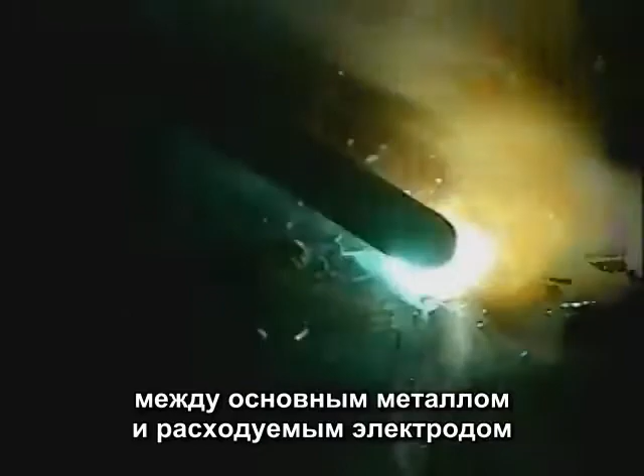From fabrication and repair shops to backyard garages, arc welding is one of the most common and versatile methods of joining metal. This is the SMAW, or shielded metal arc welding process. Electric current from a welding machine produces an arc between the base metal and a consumable electrode, which is the welding rod. That arc burns the flux coating on the rod, creating gases that shield the weld area from coming in contact with oxygen in the air. The gases surrounding the arc are superheated, causing the base metal to melt, while the filler metal from the rod is being deposited into the molten puddle.

Whether you're learning to weld to build something or make repairs, the first step is to learn how to consistently run a good weld bead. Before we start burning rod, though, there are a few things you should know about the equipment we'll be using. So let's begin with the welding machines.

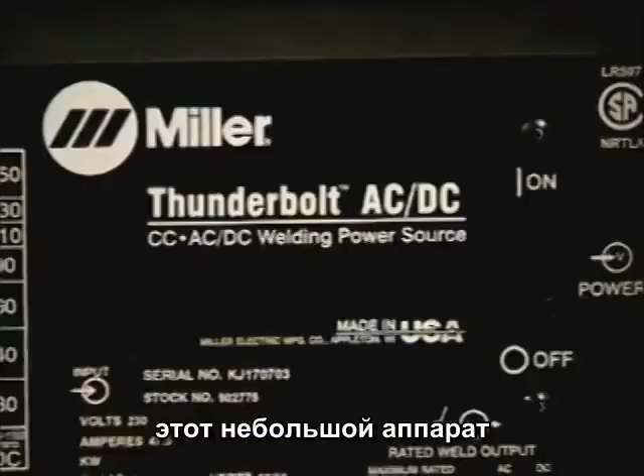The job of a welding machine is fairly simple, and that is to provide a steady, controllable current to the electrode. Regardless of the size or shape, welding machines will provide either alternating current or direct current to the electrode, and this little machine gives you the choice of either AC or DC. The main advantage of alternating current is that it's easier to produce. They use simple transformers, so you generally get more power for your money. This one will give you 225 amps on AC, but only 150 amps on DC.

If you think about alternating current, the electrons are moving back and forth, and at the point where the electrons change direction, the flow or current actually stops. Certain welding rods have been designed with stabilizers in the flux to help maintain and control the arc through these amperage lags. So if you're using a welding machine that provides alternating current to the electrode, you want to make sure to use a welding rod designed for alternating current.

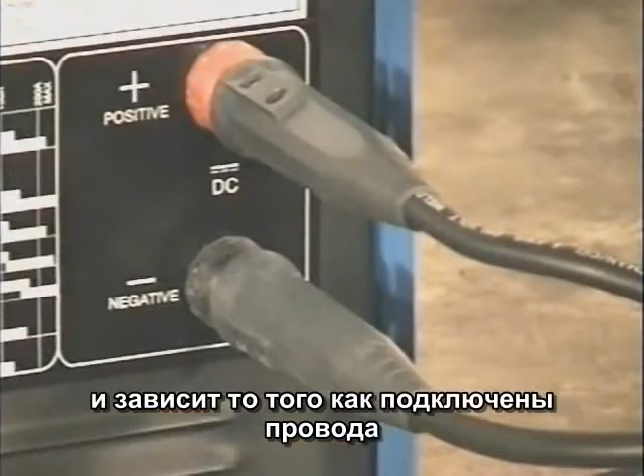Most welding shops and professional welders use machines that provide direct current to the electrode. In my shop, I use a 250 amp DC machine. Direct current provides a steady flow of electrons in one direction. The polarity, or direction of flow, is determined by how the leads are connected to the positive and negative terminals on the welding machine, and many of the newer welding machines have a switch to choose the polarity.

DC EP, or DC plus, is direct current electrode positive. The electrode is connected to the positive and the ground is connected to the negative terminal. Current is generally considered to flow from negative to positive, so with the electrode positive, the arc actually travels from the metal up to the welding rod. This causes the tip of the rod to superheat. For general purpose welding, all the common welding rods use DC EP with the electrode positive.

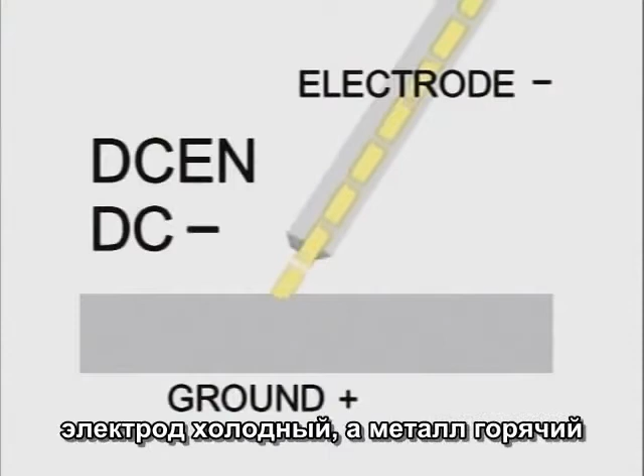DC EN, or DC minus, is direct current electrode negative. The electrode is connected to the negative terminal and the ground is connected to the positive. With DC EN, the flow is from the welding rod to the metal, so the rod stays cooler and the metal gets the heat. This is used with certain rods for high-speed sheet metal welding.

When you're starting out, you'll probably be welding with a machine that's put in front of you, and basically, if it's in proper working condition, you can weld with it. Keep in mind, though, that welding machines will weld differently. Even two identical machines may not operate quite the same. So while you're learning to weld, try to use the same machine as much as possible.

Welding leads are insulated copper wire and come in sizes like a number 4, 2, 1, and single aught. The larger the number, the smaller the diameter. The size welding lead you need to use depends on how many amps you'll be using and how long the lead is, and welding supply stores have charts to determine the size lead you need to use.

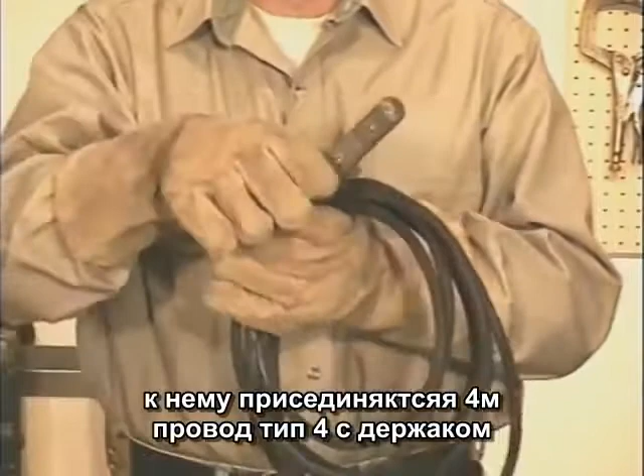On the end of the main lead, I use a quick connect with about 15 feet of number 4 lead and the electrode holder. This is called a whip. The smaller lead is a little more flexible and easier to deal with. This is a 200 amp electrode holder. Larger ones like 250 or 300 amp are available if you're mainly using big rods with high amperage settings, but for general use, the 200 amp is more comfortable. I usually call this the stinger.

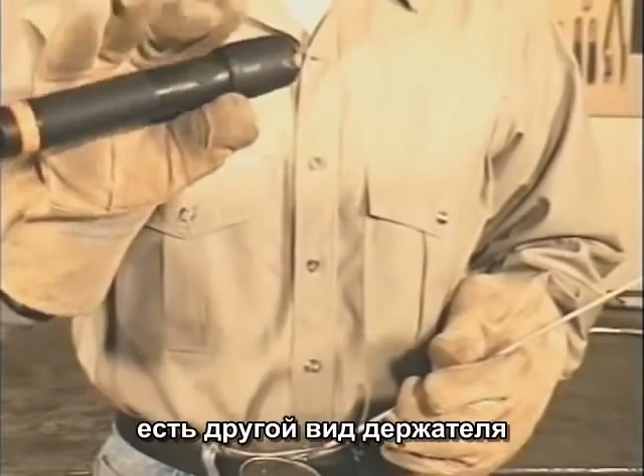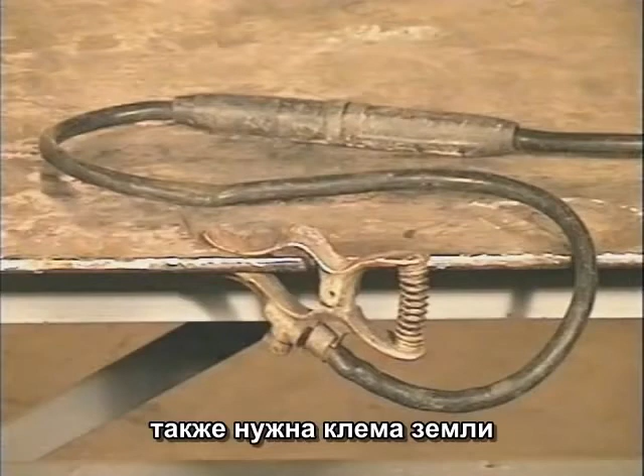Another type of electrode holder is available where you stick the rod in and twist the handle. If you need the rod at a different angle, you can just bend it. You also need a ground clamp, and I use a quick connect here too, in case I need to add more lead.

Now, the light from arc welding is extremely bright. You need filter lenses both to be able to see the molten weld puddle and to protect your eyes from getting burned. These are typically available from a number 8 to a number 14. The lower the number, the lighter the lens. From what I can tell, some people are more sensitive to this light than others.

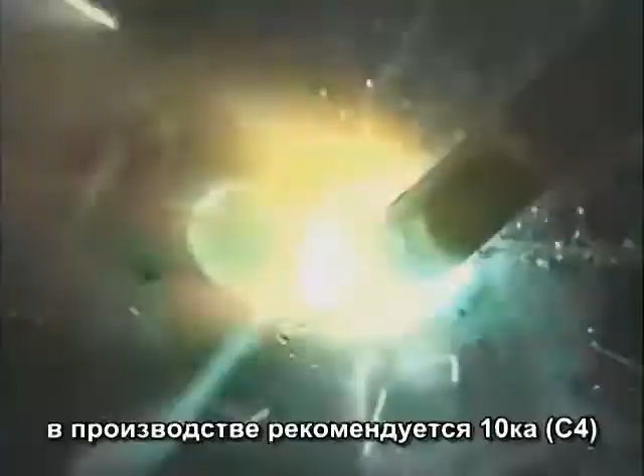A number 8 filter lens is way too light. Industry recommends a number 10, and I use a number 9. The lens has to be dark enough to protect your eyes, but light enough so you can clearly see the weld puddle. If you're welding with big rods using high amperage, you may want a shade darker lens than normal. And if this filter lens gets chipped or cracked, replace it.

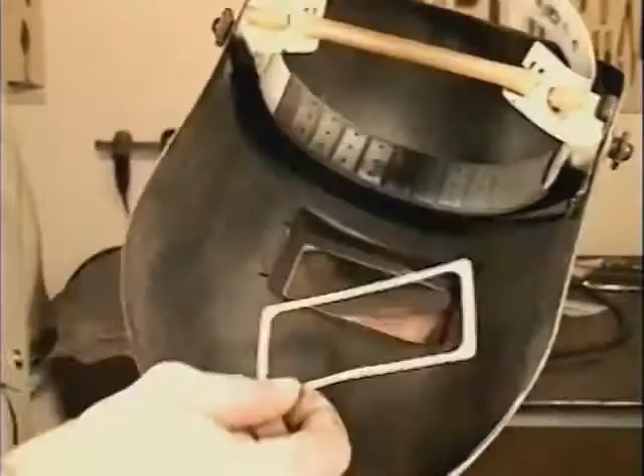To protect the filter lens from sparks or getting scratched, I use clear plastic lenses in front and in back. There's a gasket that goes in first to seal the lenses, and everything's held in place with a clip. After you install the lenses, hold the hood up to a light and check for leaks around the edges.

When you start welding, check it again. If any light from the arc is leaking around the edges of the lenses, it'll burn your eyes for sure. Also, replace the clear lenses when they get dirty or scratched. Having a clean lens makes a big difference in allowing you to clearly see the weld puddle.

Okay, the last thing we need are welding rods. So let's take a look at some of the common ones. Some of the more common welding rods for carbon steel are E6010, 6011, 6013, and 7018. And the numbers are written right on the rods. These numbers actually mean something, so let's take a look at E6010.

The E designates an arc welding electrode. The first two numbers, in this case 60, indicate that the filler metal has a tensile strength of 60,000 pounds per square inch. Depending on certain conditions of the weld, you may get a little more or less, but it'll be close to that. The 70 in 7018 indicates 70,000 pounds per square inch. So the first two numbers indicate tensile strength, and tensile strength is the force it takes to pull it apart.

The third number indicates the position the rod can be used in. A number 1 shows that the weld puddle solidifies quick enough so this rod can be used in any position: flat, vertical, horizontal, or overhead. A number 2, like in 7024, indicates that the molten puddle remains so fluid this rod can only be used in the flat position or for a horizontal fillet, which is more or less flat.

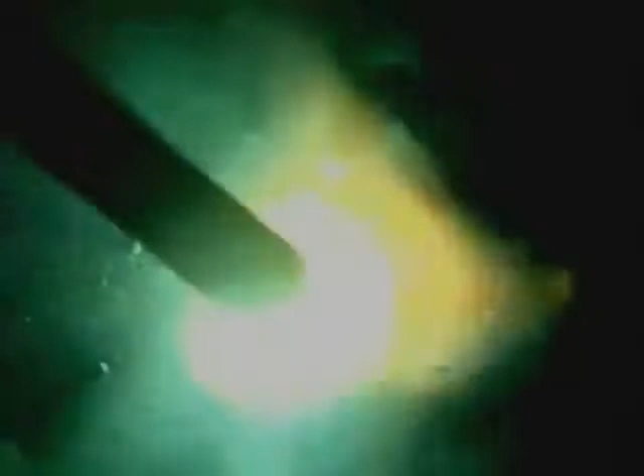The last two numbers together, here it's a 10, indicate the composition of the flux coating. And this flux is what makes the whole arc welding process possible. As it burns, a gas is created that purges the weld puddle, keeping the oxygen in the air from mixing with the molten metal, which could cause gas pockets in the weld bead called porosity. The flux also helps stabilize the arc, and it lifts impurities from the molten metal. When the flux cools, it forms a slag coating over the hot weld bead, providing more protection from the air.

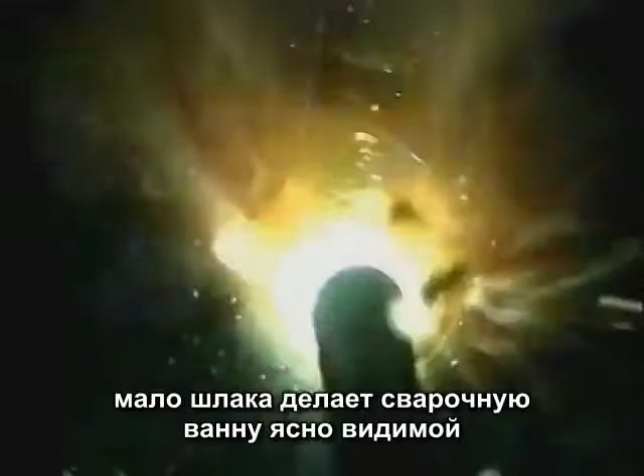There isn't a magic welding rod that just does everything. You may find one that you like to use and that produces good results, but basically welding rods can be put into one of two groups: fast freeze or filler. The fast freeze rods, 6010 and 6011, have a strong arc force that provides deep penetration. A light flux coating makes the molten weld puddle clearly visible, and the weld puddle solidifies relatively quick, leaving distinct ripples in the finished weld bead.

Filler rods, 6013, 7018, and 7024, don't penetrate as deep. They build up weld bead. A heavier flux coating covers the weld puddle, keeping it more fluid, allowing for a smoother finished weld bead.

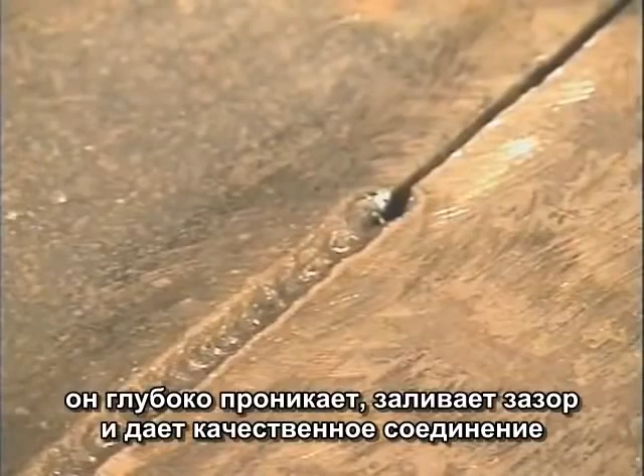So where exactly do you use these different welding rods? 6010 is used strictly on DC plus and 6011 on AC or DC plus. The strong arc force of these rods can blow off rust and paint, making these a good choice for repairs or modifications where the metal can't be completely cleaned. Also, these rods are often used as a first pass to provide deep penetration or to fill gaps in fit-ups that are less than perfect, then covered with a filler rod.

6013 was actually designed for high-speed sheet metal welding on DC-, but these rods can also be used on AC or DC+ for general purpose welding and light fabrication. With stabilizers in the flux, 6013 is probably the easiest of all the rods to use, and it produces a smooth finished weld bead.

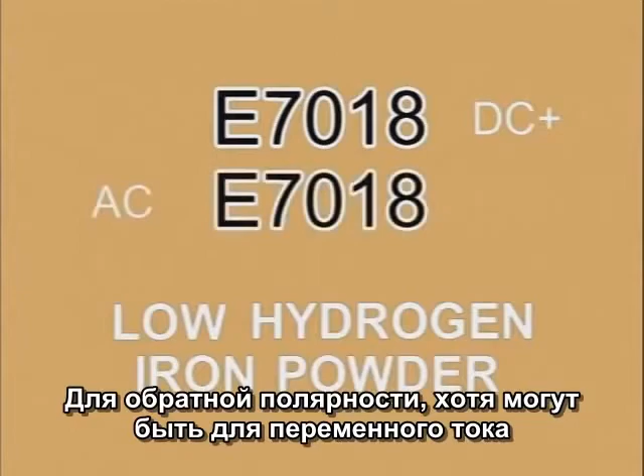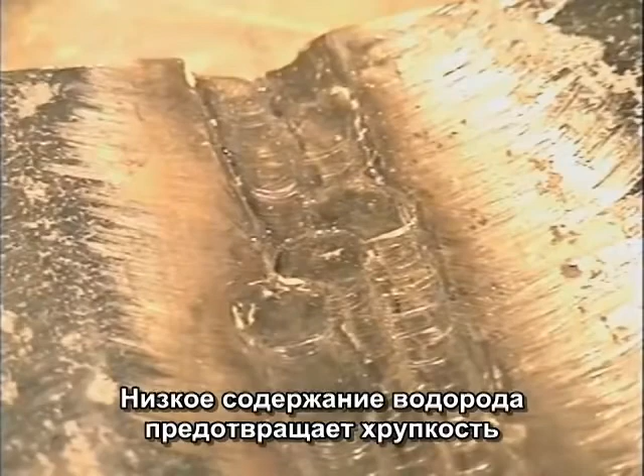7018 is a low hydrogen rod with iron powder in the flux. It's generally used on DC+, and an AC 7018 is also available. These produce the highest quality welds and were developed for situations where there's extreme stress on the weld joint. It can be used to weld some of the harder low alloy steels and cast steels, and when making heavier welds, the low hydrogen characteristics prevent the weld from cracking because of the expansion and contraction of the metal.

Iron powder in the flux provides a high filler metal deposit rate, which means you can put more metal down faster. 7018 produces a smooth finished weld bead, but does require clean metal and a well-prepared joint.

7024 was used extensively in fabrication before wire feed. A heavy flux coating produces an extremely smooth weld bead, but these rods do require clean metal and a slightly higher amperage setting. 7024 can be used on DC+ or AC, and the 2 does indicate that this rod can only be used in the flat position.

6010, 6011, 6013, and 7018 are common rods and should be available everywhere. There are other welding rods, and they'll either be a fast freeze or a filler, with a different tensile strength, a slightly different flux covering, and usually designed for a specific purpose.

Now, each of these rods has distinct characteristics, but there are some basic fundamentals that are common to all of arc welding. We'll start with the fast freeze type rods because the light flux allows you to see the molten weld puddle clearly.

The fast freeze rods 6010 and 6011 are similar, and the same techniques can be used with either one. 6010 on DC+ might freeze or solidify a little quicker. 6011 with either AC or DC+ may be a little easier to use because of the stabilizers in the flux that help maintain the arc.

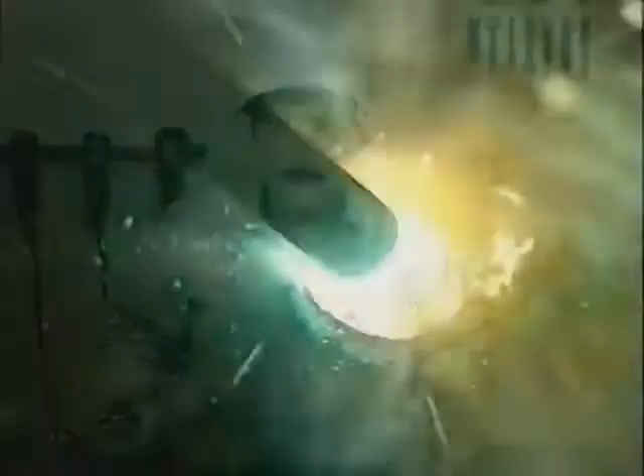Let's start by watching a weld, and I'll try and describe what to look for. After scratching the rod against the metal to make contact, the tip is held about 1/8 of an inch or 3 millimeters off the surface. This creates a gap for the arc to cross, and that's where the bright light comes from.

While you're welding, don't watch the light. Look past it, through the smoke and sparks, and focus on the molten puddle of metal behind the rod. Welding takes a little practice, but it's not very difficult.

Let's go through this step by step. First of all, you need to pay attention. This is ready to go. Anytime the tip of the rod touches the metal, it will arc. Okay, you want to get comfortable. Welding rods burn for about a minute, and it's a long ways out to the tip of the rod.

So get comfortable and relax. Rest your arm on the table and use both hands on the stinger so you can be as steady as possible. When you're all set, either reach up and flip your hood down, or you can adjust the knobs on the side to flip the hood down with a nod.

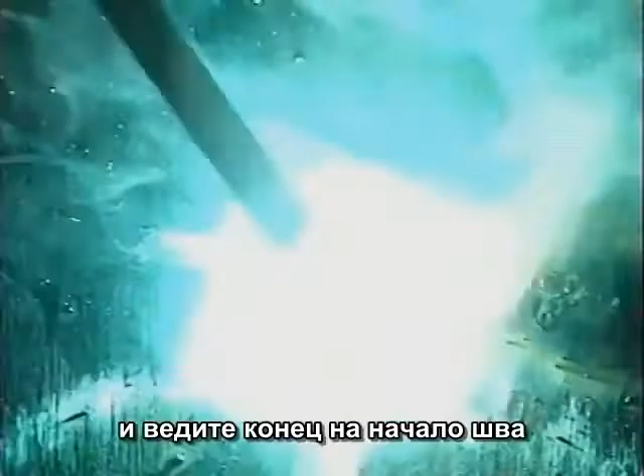Starting the arc is like lighting a match. Drag the rod right against the metal. When it lights, bring the tip up and move back to the start. A scratch start gets the flux burning, forming the gases that purge air away from the molten puddle. To avoid leaving arc burns all over the metal, try to scratch right where you intend to weld.

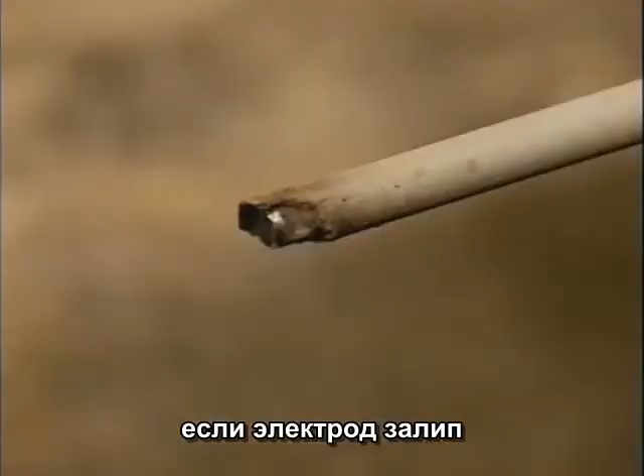I usually hold the stinger with my thumb on the release lever. If the rod ever sticks, just open the stinger, then go back and break the rod off. If you're relighting a rod, the flux may be broken off a little at the tip. A scratch start will burn off that tip before you start depositing metal.

Once the rod is burning, you need to start the puddle, giving the molten filler metal a little extra time to fuse to the base metal. This doesn't take long, only 2 or 3 little circles. Also, as the weld progresses, the base metal will heat up, causing the molten puddle to spread out. Start the puddle wide enough to keep the weld bead a uniform width.

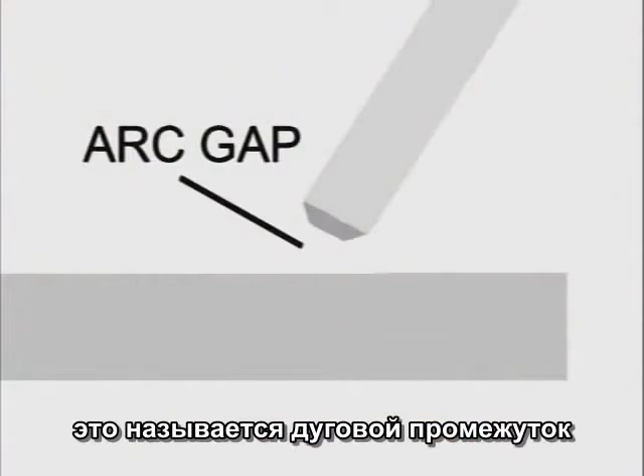During the weld, the tip of the rod is held up off the metal. This is called the arc gap. Having control of this arc gap is one of the first and may be the most important thing you need to learn. As you're moving along to build weld bead, the rod is being consumed, so you also have to be moving in. And the whole time you need to maintain a constant, uniform gap between the tip of the rod and the base metal.

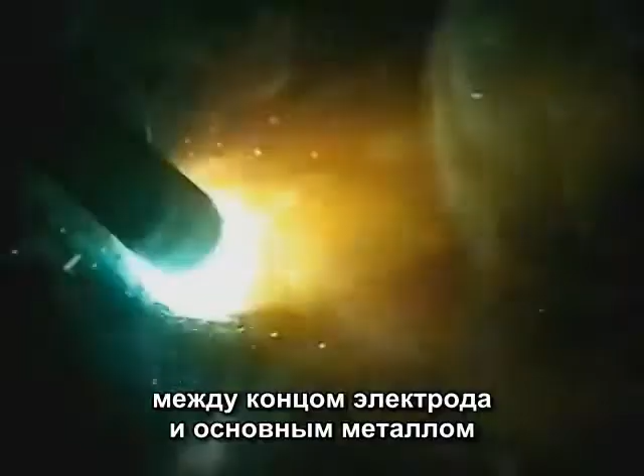If the tip of the rod is jammed right down on the metal, the arc doesn't have time to heat up the base metal.

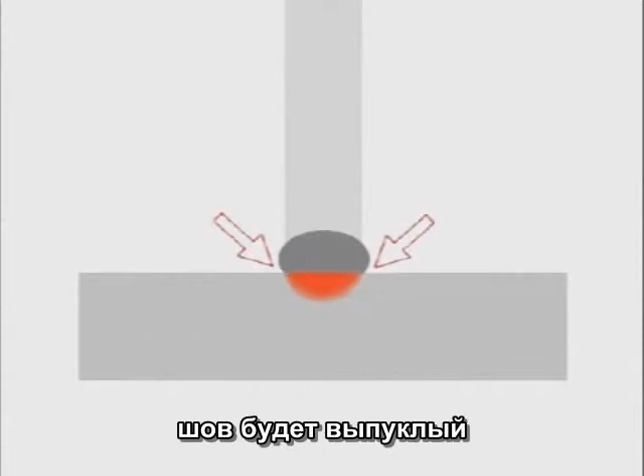The weld bead kind of squirts out the back, not tying in well on the sides. If the arc gap is too long, the arc itself can jump around, and penetration will vary, so you lose control of how the filler metal is deposited.

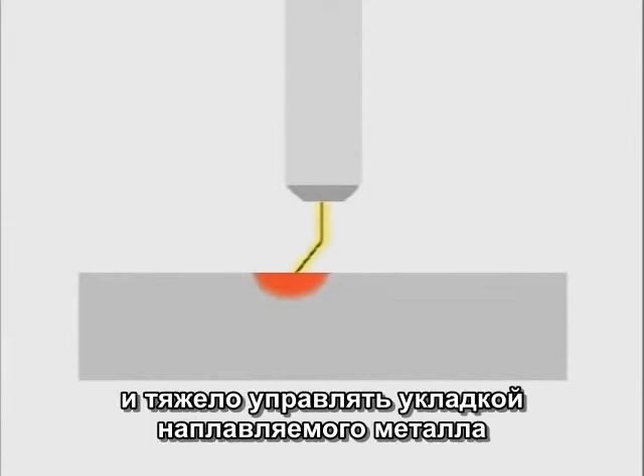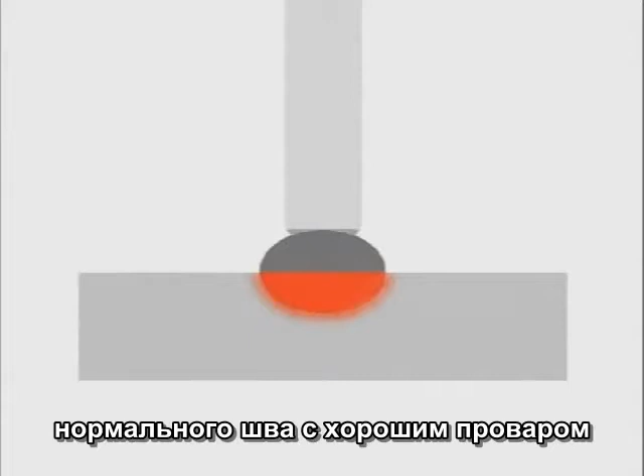Maintaining a constant arc gap is the first step to controlling the molten puddle and producing a uniform weld bead with consistent penetration. The better you learn to control that arc gap, the better you'll be able to weld.

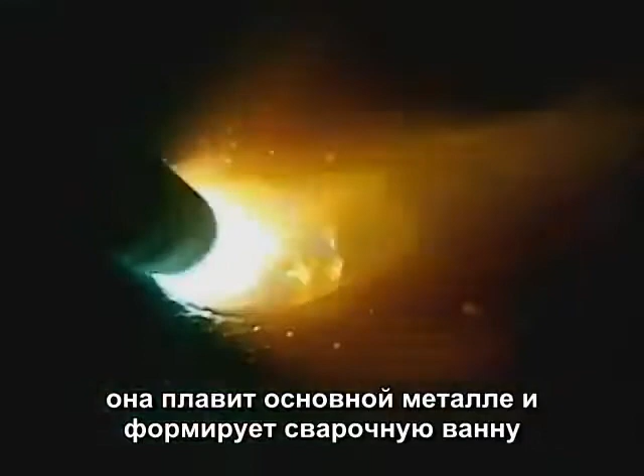When the arc crosses the gap, it melts the base metal, forming a molten puddle. That arc stream also carries the filler metal from the rod into the puddle.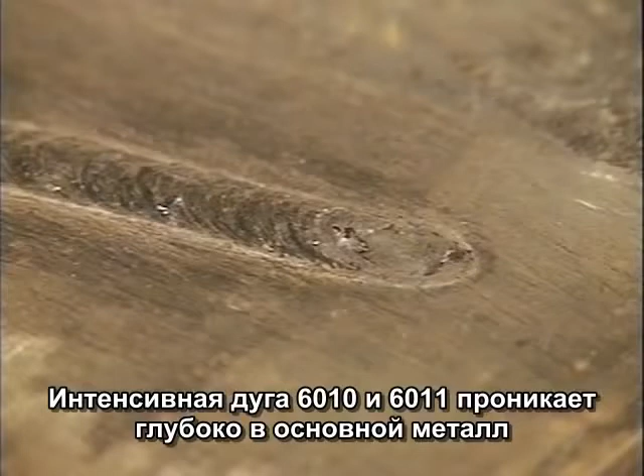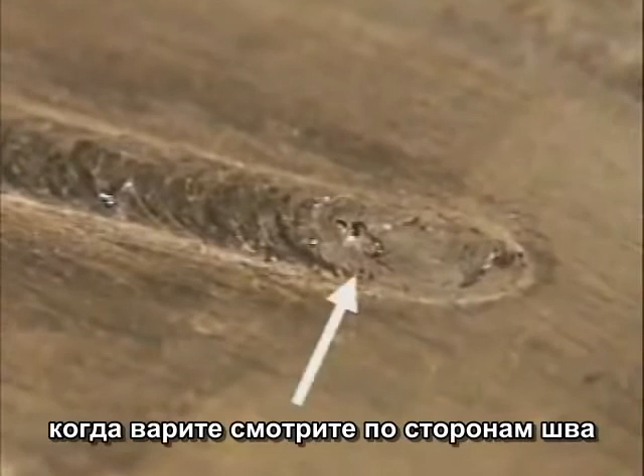This is a 6010 weld bead that I pulled out of quickly. The leading edge of the puddle was actually below the surface of the metal. The strong arc force of 6010 and 6011 penetrates deep into the base metal and pushes the molten puddle back, building up weld bead. While you're welding, watch the sides, right where the weld buildup meets the surface of the base metal. For building up weld bead, either a circular or zigzag motion is commonly used.

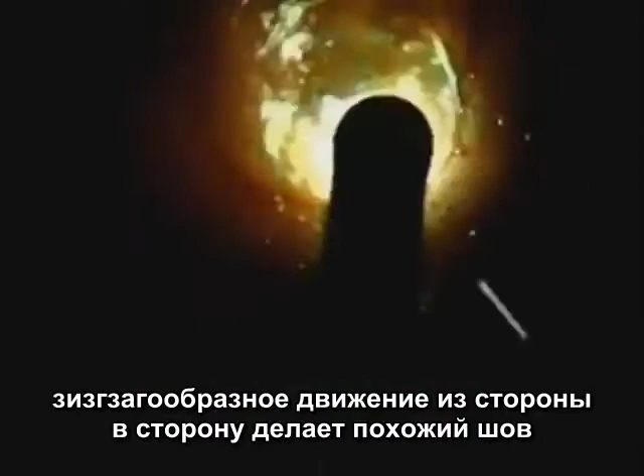With a circular motion, as you ease the puddle over, watch the edge. When you bring it across, watch the weld build up, then the other side, and just ease the puddle around and around. A side-to-side or zigzag motion will produce nearly the same weld bead. Watch the outside edge, the weld build up, and the outside edge every time you cross.

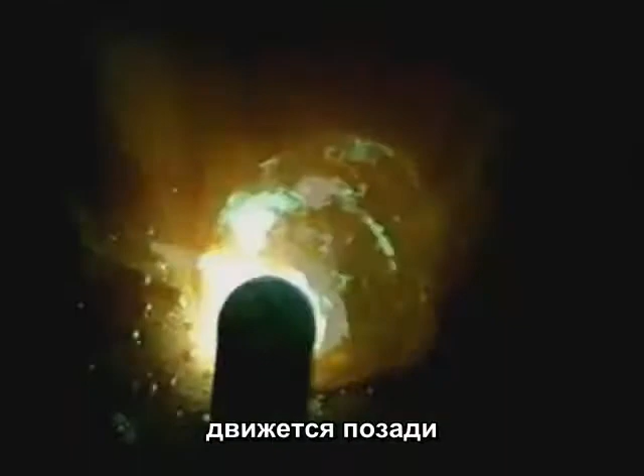Something you want to keep in mind is that molten metal will follow the heat. Whenever you move the puddle across, while you are adding filler metal from the rod, molten metal is also following from the side. If enough metal isn't put back there when you come around again, you'll leave undercut. Undercut is a void or groove along the edge of the weld bead that's below the surface of the base metal. You can avoid this by always watching the outside edges to make sure the puddle is filling in and tying in at the surface.

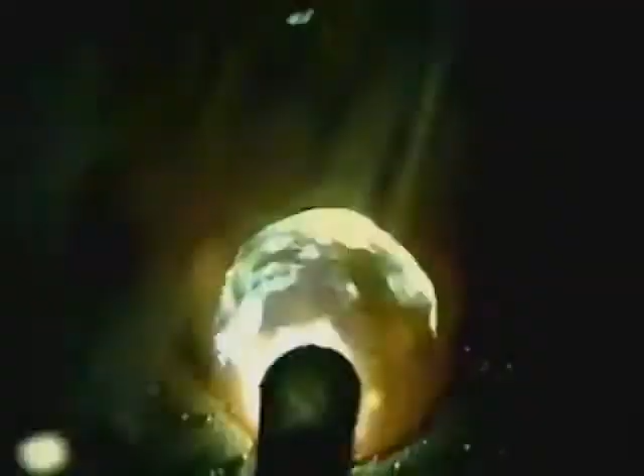There's an arc force at the end of this rod that we can use to help manipulate the weld puddle by angling the rod. Think of it more like pushing the puddle instead of dragging it. Generally speaking, the straighter up and down you hold the rod, the less weld buildup. As you angle the rod, the more the weld bead will stack up.

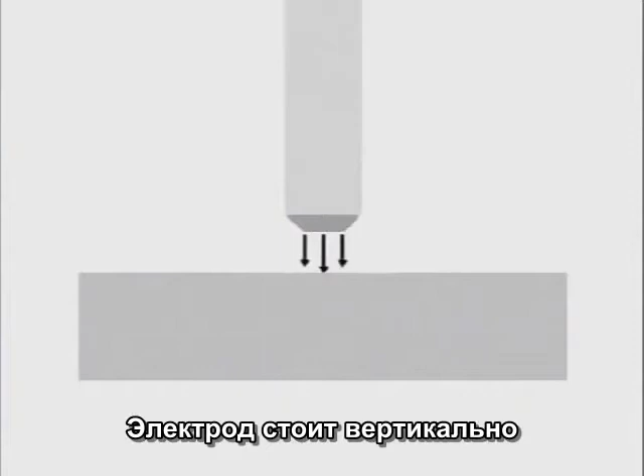When the rod is held straight up and down, all the heat is concentrated right under the rod, and the arc force drives the puddle down. This results in deep penetration and spreads the puddle out for a flatter weld bead.

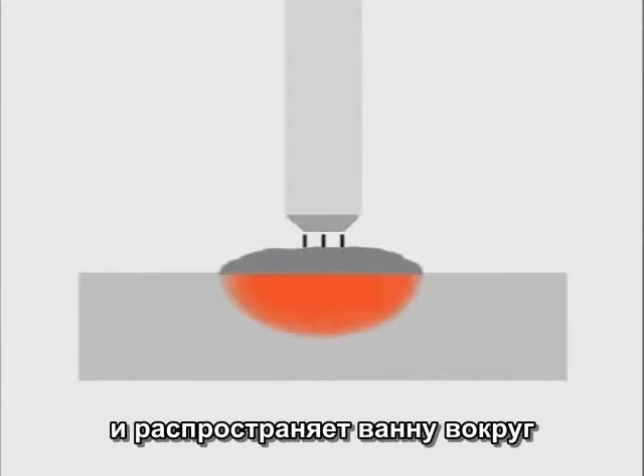As the rod is angled, the arc force is directed more to the back of the puddle, allowing the weld to build up. If the rod is angled too low, the arc is directed right where you're trying to build weld, making the puddle hard to control.

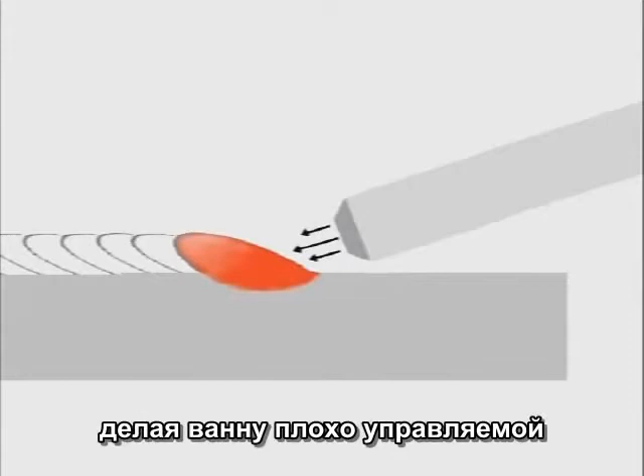You will run into situations where you may want to flatten out the weld, or you'll need to push the puddle back more, so you'll use different rod angles. When you're starting out, an angle somewhere between 45 degrees and straight up and down is comfortable, allows a good view of the puddle, and works well for building weld bead.

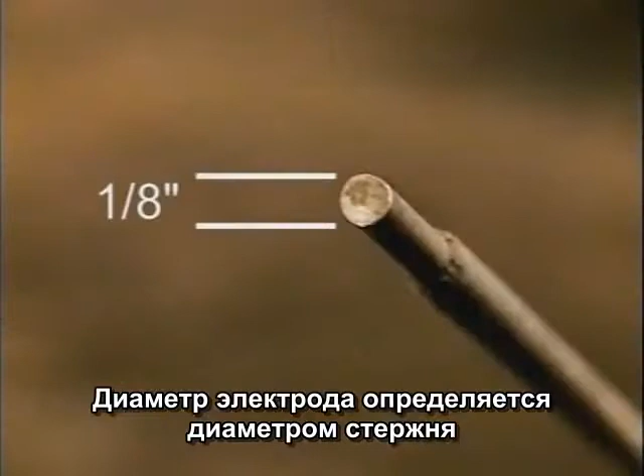The rod size is the diameter measurement of the metal in the electrode. Common sizes are 3/32, 1/8, and 5/32. Most welding rod size charts, where they give the metal thickness to the rod size and amperage setting, are generally from the point of view of maximum weld in minimum amount of time, often not taking into account the welder's ability or different welding situations.

You can always use a smaller diameter rod for better control. It just takes a little longer to build up weld bead. This is a 1/8 E6010 electrode, and this is the most common size used. The manufacturer's recommended amperage setting is from 75 to 130 amps. They're saying this rod will work over a 55 amp range.

The specific amperage setting is considered a variable and depends on metal thickness, position of the weld, and the welder's ability. The whole purpose in arc welding is to get the base metals hot enough to melt, forming a molten puddle. If the amperage is set too low, the base metal doesn't get hot enough, and the puddle looks like it's following the rod around.

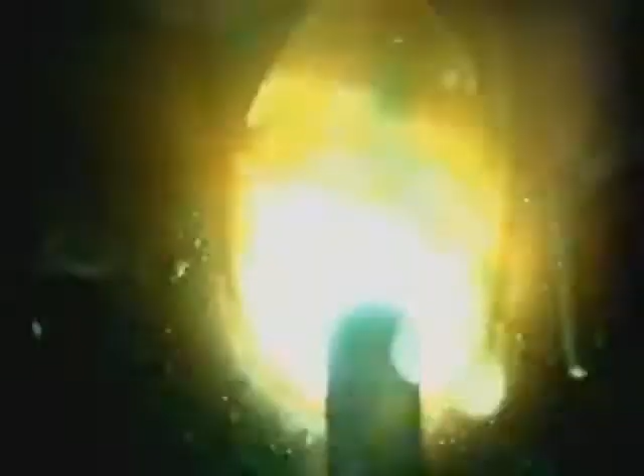If the amperage is set too high, the base metal gets too hot. The stronger arc force gouges deep into the base metal and pushes the puddle back. When the amperage is set about right, the puddle will spread out and the outside edges tie in immediately. You can ease the puddle around, kind of pushing it with the movement of the rod.

Depending on each welding situation, the amperage setting can change. Thicker metal dissipates the heat, so you need a little more amperage. Thinner metal will get hot fast, so you can use a little lower amperage. The final amperage setting is determined by what the molten puddle is doing.

You do need a place to start, so try about the middle of the manufacturer's recommended range, and don't be afraid to go up or down a little bit.

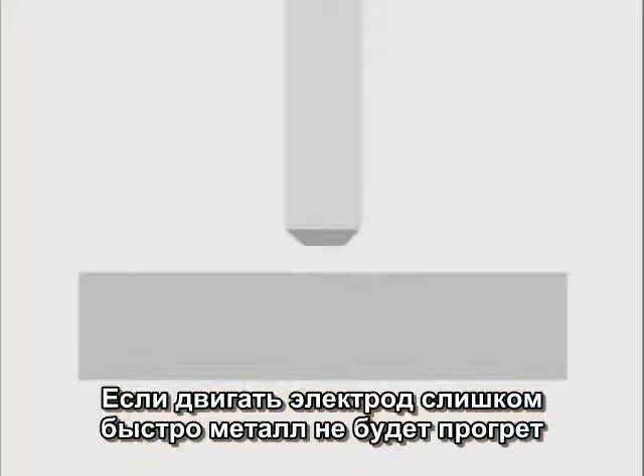Welding really is about the temperature of the base metal, so we can't talk about the amperage setting without looking at the speed of progression, or travel speed. The faster you move, the less time heat is put to the base metal, so it stays cooler. When you move slower, you're putting the heat to it for a longer amount of time, so the base metal gets hotter. When you move too fast, the metal doesn't have time to heat up, so the weld bead just skates across, not getting any penetration.

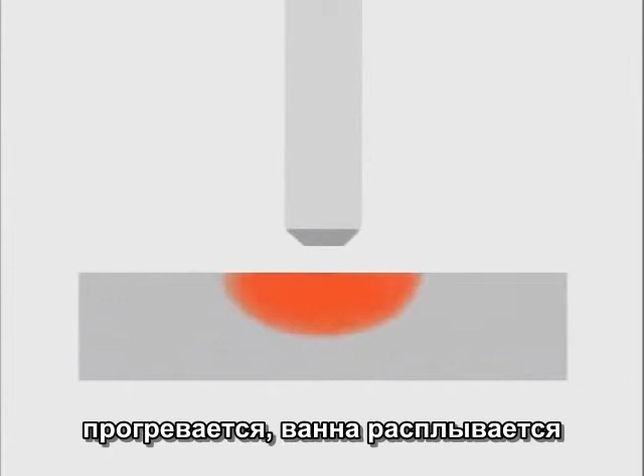If you move too slow, the metal gets extremely hot, causing the puddle to spread out, making it hard to control. When the travel speed and amperage setting match, the puddle spreads out, but it's still controllable. The sides tie in and the weld builds uniformly.

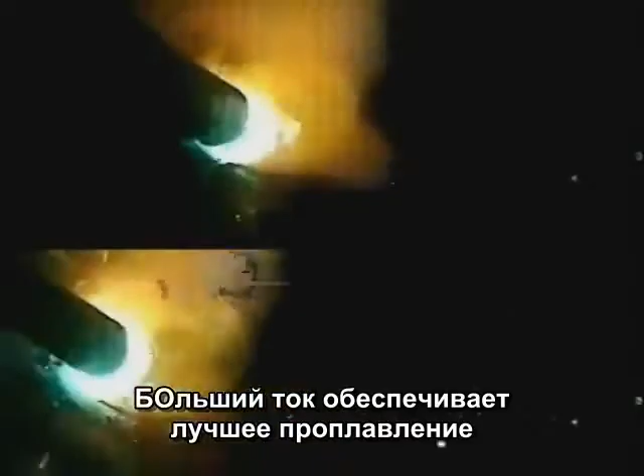As you gain more control of the rod, try using a slightly higher amperage setting and increasing the speed of travel. The higher amperage setting provides better penetration and a smoother finished weld bead. Try to weld as hot as you can control the molten puddle.

To finish a weld bead, add a little extra metal before you pull out, to avoid leaving a crater that's below flush with the surface of the base metal. Circle the rod once or twice, then bring the rod up and back over the weld.

While different rods may not look quite the same, these are the basic steps for all the welding rods. Scratch to get the arc going. Start the puddle wide enough to keep the weld a uniform width. Maintain a uniform arc gap with an amperage setting high enough to let the puddle spread out.

Ease the puddle around using the force of the arc and watch the sides and the weld build up. Add some filler metal before pulling out over the weld bead. That's about all there is to it. For 60-10 in the flat position, try a circular motion and angle the rod to build up weld.

Watch the molten puddle, not the light. Keep the circles tight for a smoother weld bead. A zigzag motion will produce about the same weld. Watch the edges to make sure they're filling in and ease the puddle back and forth.

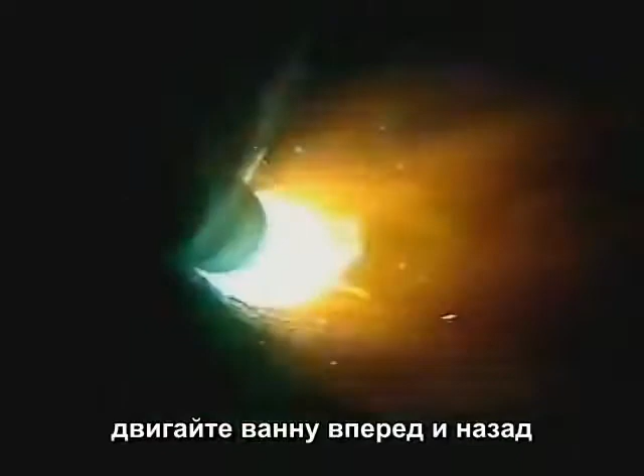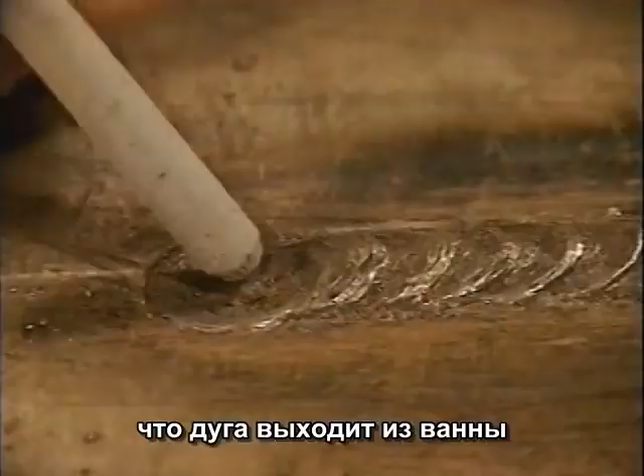Because of the strong arc force and light slag, you can also use a whip or step motion, and this is what makes the fast freeze rod so versatile. The tip of the rod is moved back so the arc is actually brought out of the puddle. Then molten metal is pushed back in.

With the step motion, watch both sides and the weld build up every time you push the puddle in. This kind of rod movement can be used for deep penetration by digging down on the backstroke, then filling the gouge in.

On thinner metals, where you don't need a lot of penetration, you can puddle, then long arc to let the weld bead cool, and puddle again. The thinner the metal, the faster this goes.

The step motion can also be used to fill gaps in poorly fit joints. Keep the rod deep in the gap and bring it back, allowing the metal to cool. Then push a little more metal in to fill the gap and let it cool again. The step motion may not always look real slick, but it's usually covered with another pass.

So far, we've been welding in the flat position. For a vertical with 60-10, you can run either uphill or downhill. Downhill is easier, but there's less penetration and weld buildup. Because heat rises, you're welding away from the heated metal, so you can use a slightly higher amperage setting.

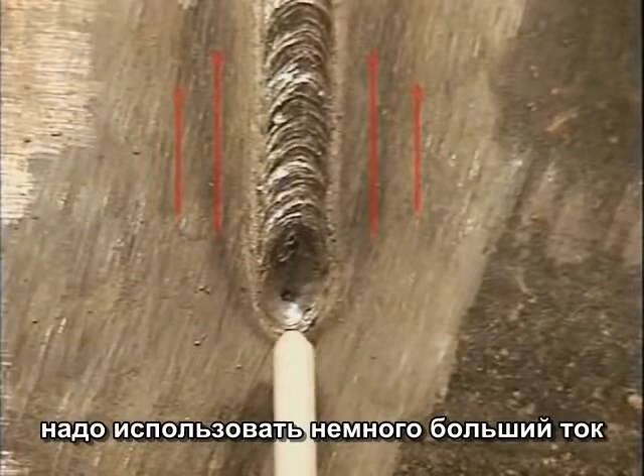Watch the sides and the weld buildup. Try a circular, zigzag, or step motion and angle the rod up a little so the force of the arc helps hold the puddle up.

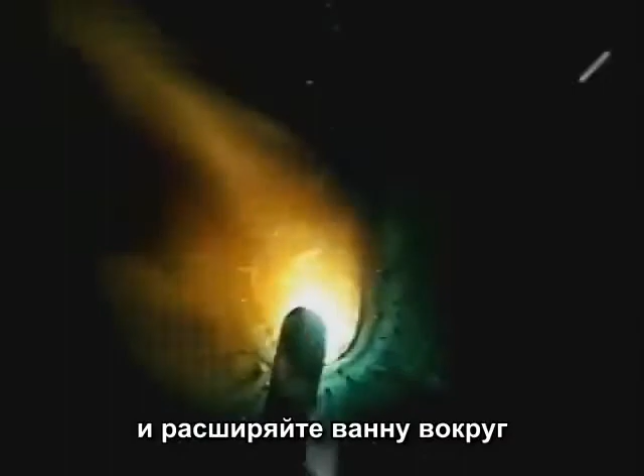With a circular motion, keep a steady arc gap and ease the puddle around. Move fast enough to stay ahead of the molten puddle. If the puddle wants to drip down, try moving faster, or maybe even a slightly higher amperage setting.

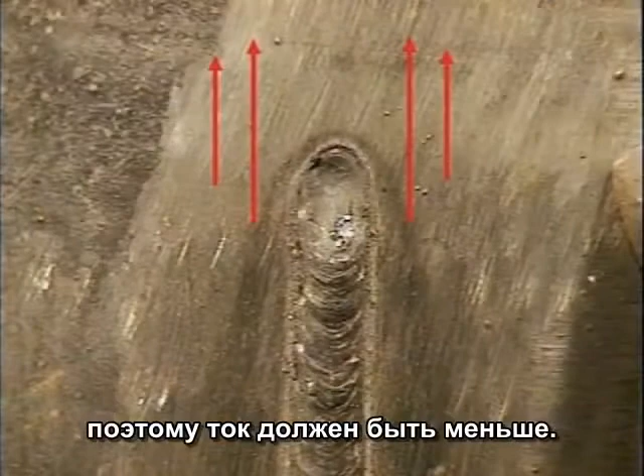When you weld uphill, you'll be welding into the heated metal, so turn the amperage down a little. Angle the rod up so the force of the arc doesn't blow the puddle out. An uphill weld really gouges into the base metal, making undercutting a potential problem. So pay particular attention to the sides of the puddle and watch the weld buildup underneath the rod.

If the base metal gets too hot, the puddle may fall out, or you might burn a hole right through the metal. Adjust the amperage setting and your travel speed until you can carry that puddle right uphill.

A horizontal weld is across, and you want to angle the rod to push the puddle up. Keep the rod nearly perpendicular to the metal, or angle into the weld a little bit. If you angle the rod too far, the arc force can blow the puddle out. Using a circular motion, keep a steady arc gap and just ease the puddle around.

Every time you bring the rod down, the molten metal will follow the heat. Make sure you push the puddle up and watch the top side. If the bead is wanting to sag down, try a faster travel speed to keep the base metal cooler.

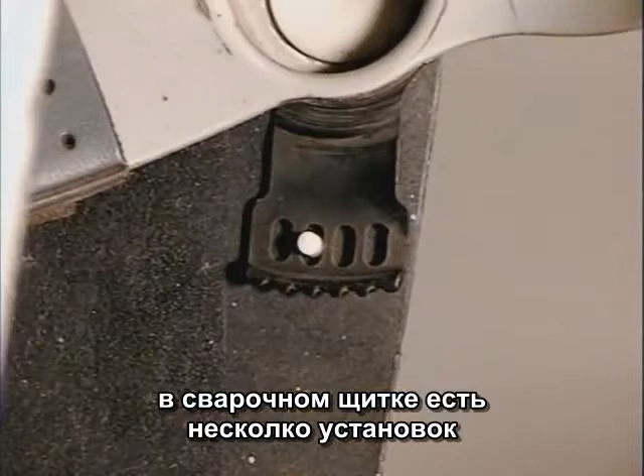That leaves us with overhead, straight up and down. Overhead is about the same as welding flat, just a little more awkward. The real challenge is to find a comfortable position so you can keep the rod steady. Your welding hood should have an adjuster to help hold it up, so you don't have to bend your neck back so far.

Now, believe it or not, the molten puddle doesn't want to fall out. Unless you blow it out with the arc force, the molten metal wants to stay with the heat. It likes the heat. Hold the rod nearly straight up and down, or angled slightly in the direction of travel, away from the weld. Try a circular motion and just make the puddle look the same as when you're welding flat. All the sparks will be coming your way, so wear protective clothing like a leather coat, some good gloves, and I like to cover my ear with a hat. Getting burned is a little distracting when you're trying to run a good weld bead.

6010 and 6011 won't give you a smooth finished weld bead, but they do provide deep penetration in weld joints and when making repairs.

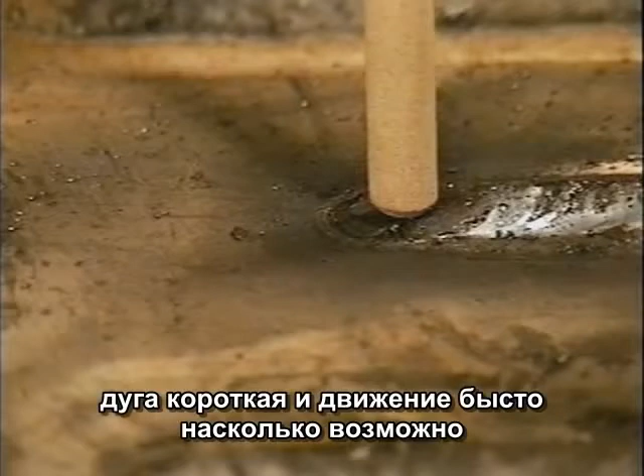6013 welding rods were developed for welding sheet metal on DC-. The rod is held perpendicular to the metal with a tight arc, and the travel speed is as fast as you can go without having the weld bead skip.

Today, 6013 is more often used for general purpose welding with AC or DC+, and it is a good rod for the small, low amperage welding machines. One of the first things you'll notice about 6013 is that there's a heavier slag coating on the weld bead. The slag even covers the top edge of the weld puddle. This keeps the puddle more fluid, helping to produce a smoother, finished weld bead.

Typically, 6013 is available in 3/32, 1/8, and 5/32. 1/8 is the most common size used, and try starting with an amperage setting around 130 amps on AC or 115 amps on DC.

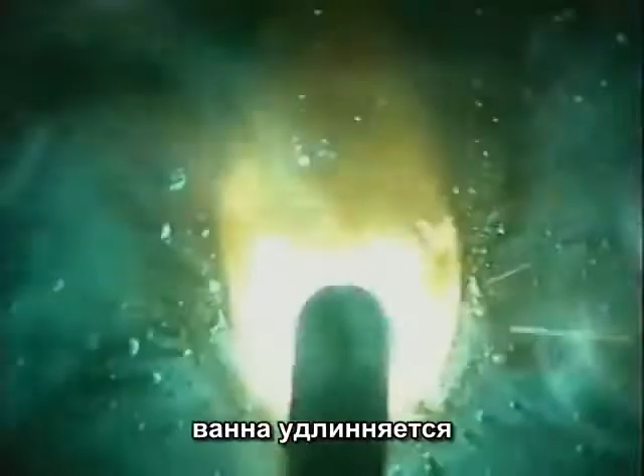Because of the slag covering, the differences in the appearance of the weld are a little more subtle, but when the amperage is set too low for the situation, the puddle will follow the rod around, taking longer to tie in on the sides. The heavier slag may even interfere with the arc. If the amperage is set too high, the molten puddle and slag are extremely agitated and remain molten longer. When the amperage is about right, the weld puddle spreads out, tying in and moving easily with the motion of the rod.

In the flat position, you can run straight or try a little side-to-side motion. Angle the rod somewhere between 45 and 90 degrees to build up weld bead. Scratch start the puddle, and maintain a short arc gap, even to the point of lightly resting the tip of the rod on the metal. Watch the puddle. The slag covers the top edge, but you can still get an idea of the weld buildup. Watch the sides to keep the weld bead straight, and just ease the puddle side to side.

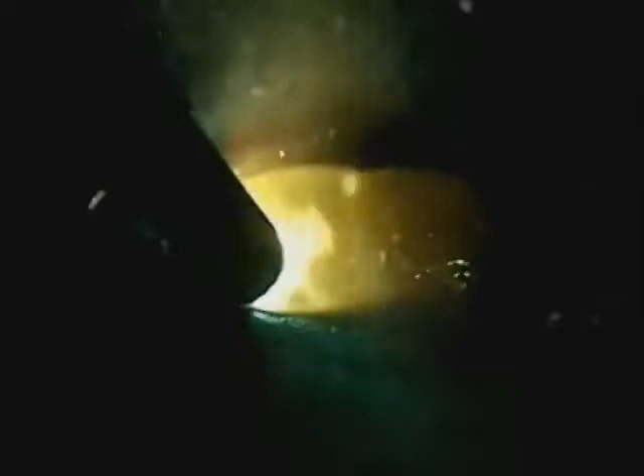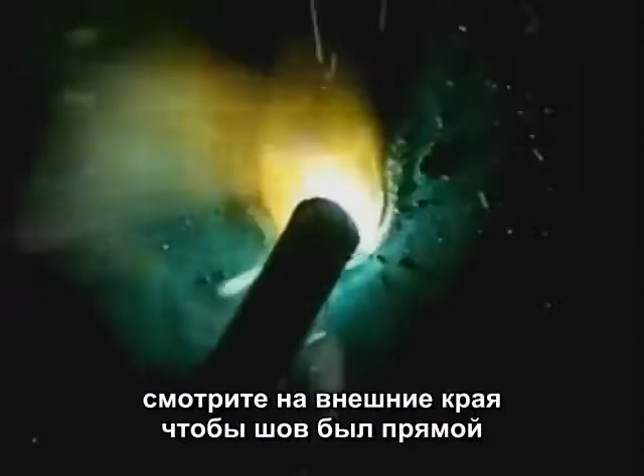On vertical welds, 6013 was designed for a downhill application. You'll be welding away from the heat, so try turning the amperage up 5 to 10 amps. Angle the rod up so the force of the arc helps hold the puddle up. Maintain a short arc gap and try a slight side-to-side movement. Watch the outside edges to keep the weld bead straight, and travel fast enough to stay ahead of the molten puddle.

If you can't stay ahead of the molten puddle coming down, try moving a little faster or raising the amperage setting. For more weld buildup on heavier metal, 6013 can be run uphill. Start by turning the amperage down 5 to 10 amps.

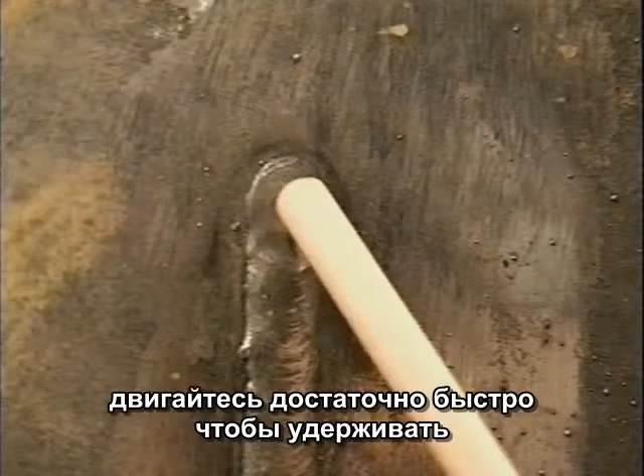Try using a side-to-side motion, moving up fast enough to keep the puddle from dripping down. Make sure the sides are filling in to avoid leaving undercut. To make a horizontal weld, angle the rod up to help push the puddle up.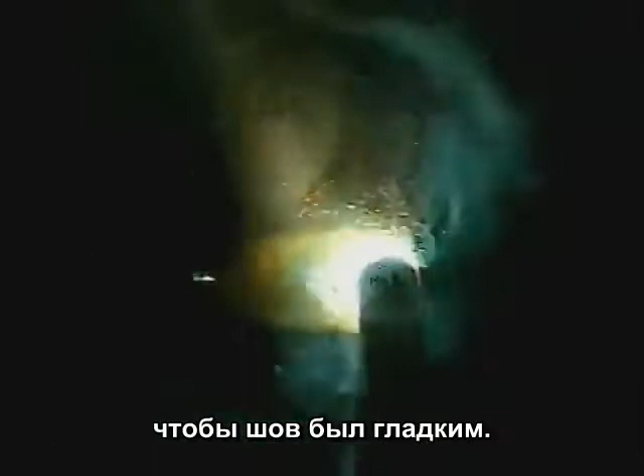Keep the rod nearly perpendicular to the metal or angled back into the weld just a little. Maintain a short arc gap and constant travel speed to produce a smooth weld bead. The molten slag will run down, covering the bottom, but watch the top side of the puddle. Move fast enough to avoid excessive weld buildup.

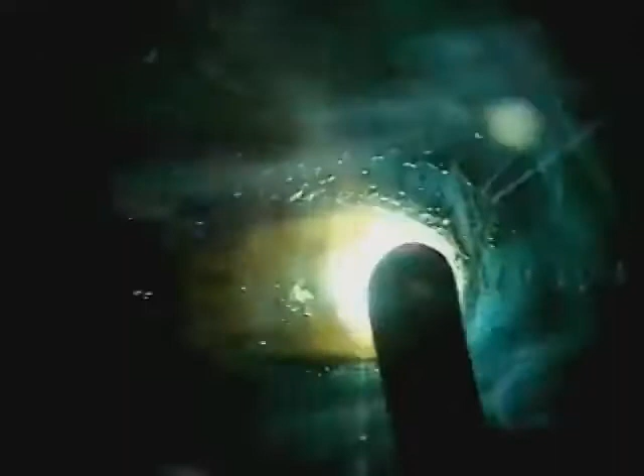While you're learning to weld horizontally, don't try to carry too much metal. Keep the weld bead small. If you need more weld, you can always run a second pass above the first one.

Overhead with 6013, like every other type of welding rod, is awkward. Hold the rod straight up, or, because of the mild arc force, you can angle it back into the weld a little bit, and try a slight circular motion. The heat of the weld is going straight up, right where you want it.

So if you can get in position to maintain a short arc gap and uniform travel speed, overhead will produce a good weld. 6013 is the favorite rod in many home shops. They're easy to light, they maintain the arc, and produce a good-looking finished weld bead.

7018 produces an extremely high-quality, good-looking weld bead. This is the rod to use for heavier fabrication and repair or any situation where there's stress on the weld joint. These rods rely on a heavy slag coating to protect the molten weld puddle from coming in contact with oxygen in the air. This heavy slag makes 7018 run a little different than the other rods we've looked at.

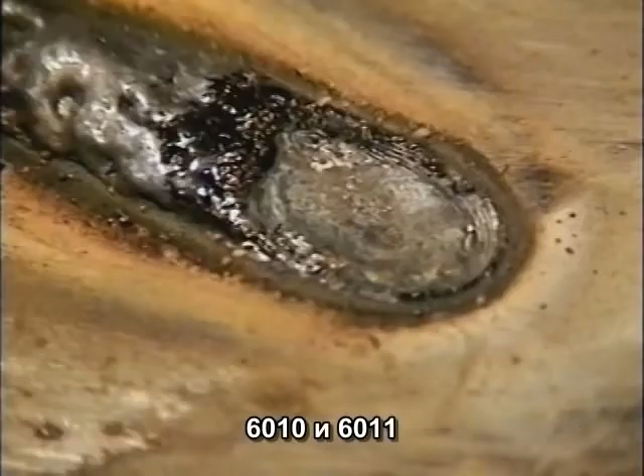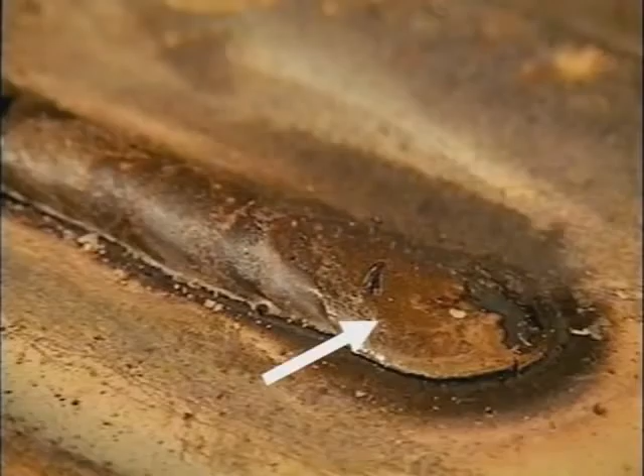With the fast freeze rods, 6010 and 6011, the molten metal in the weld puddle is completely visible. Slag covers the top edge of the molten puddle with 6013, but the filler metal and slag solidify pretty much at the same time. With 7018, the entire weld puddle is covered by molten slag. The filler metal actually solidifies underneath, while the slag stays molten on top.

If you keep in mind that what you see is molten slag and understand what the metal is doing underneath, 7018 is fairly simple to use. And even though the metal is solidifying underneath, watching the molten slag behind the rod will give you an idea of the weld buildup.

7018 is a little more sensitive to arc gap and rod movement. Make sure you're comfortable so you can be as steady as possible. A scratch start will get the flux burning before you deposit any metal.

If you're relighting a rod, there's usually slag covering the tip. You may have to bump the rod to break that slag, then scratch to get going. Once the rod is lit, start the puddle.

Besides tying in and getting started wide enough, this gives a little extra time for the gases to cook out of the molten puddle. If you move too quick, gas pockets may cause voids in the weld bead called porosity.

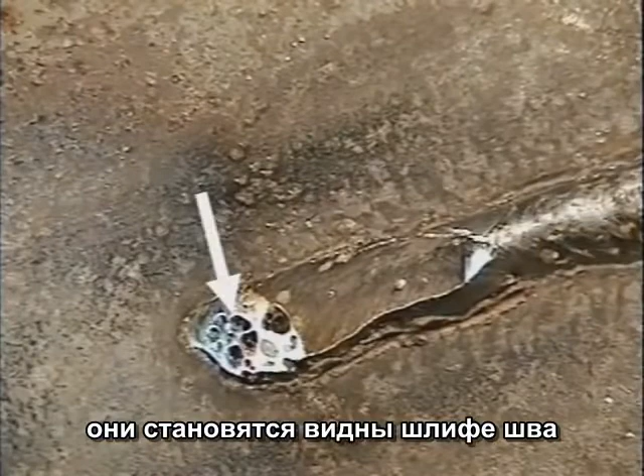Most times they're not even visible until you grind into the weld bead. Porosity can also be caused by welding on metal that's rusted, painted, or has any contaminants on it like oil or grease. 7018 does require clean metal.

After the puddle is started, try a little side-to-side motion, maintaining a constant, short arc gap. In some situations, you can even lightly rest the rod on the metal. With a mild arc force and slag covering the puddle, you do want to avoid letting the rod burn up or pulling the rod away from the metal. You don't want to let that slag cool, so keep the arc in the puddle.

The typical rod sizes are 3/32, 1/8, and 5/32. Because the flux contains iron powder, which deposits more metal in the weld puddle, 7018 requires a little higher amperage, and these settings may vary up or down depending on metal thickness, weld position, and your ability to control the movement of the rod.

With molten slag covering the entire puddle, you depend more on how the puddle acts than how the puddle looks. If the amperage is set too low for the conditions, the puddle won't spread out, taking longer to tie in on the sides.

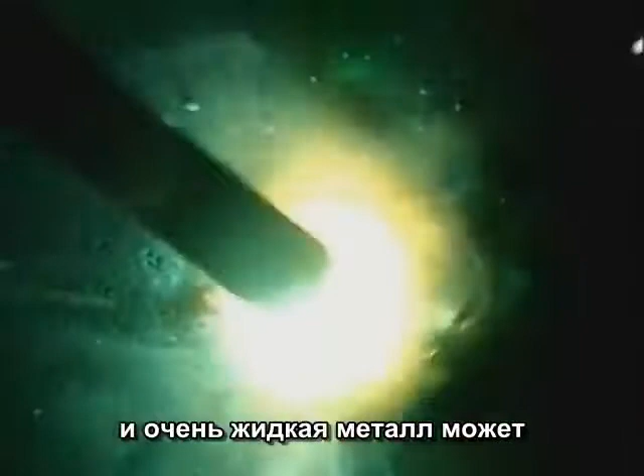The rod might stick or go out. If the amperage is set too high, the puddle is agitated and extremely fluid. Little balls of metal might dance off to the sides, causing excessive weld spatter.

When the amperage is about right, the slag solidifies back from the rod. The sides tie in and you can ease the puddle side to side. Here again, as you gain control of the arc gap, rod movement, and travel speed, you'll find that 7018 runs easier and cleaner with the amperage set a little to the hot side.

The angle of the rod not only affects how the filler metal is deposited, but how the molten slag will behave. If the rod is held straight up and down, the slag can get in front of the weld puddle. If the rod is laid too far down, the flux coating won't burn evenly and the rod may stick. When the rod is angled between 45 and 90 degrees, the slag is forced back where it belongs, over the molten filler metal.

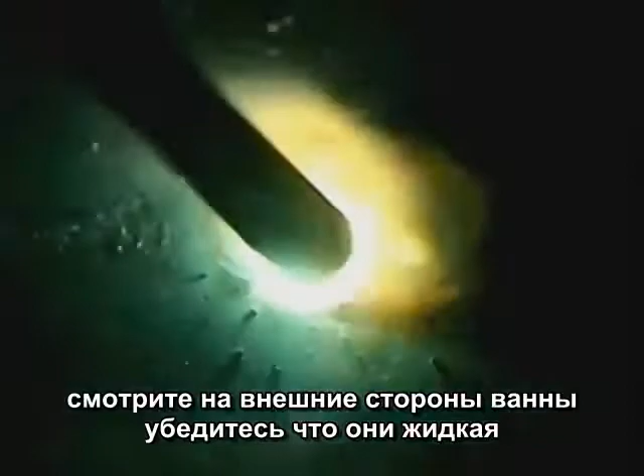Welding in the flat position is fairly simple. Remember to relax, get comfortable, and use two hands on the stinger. Try to maintain a short arc gap and constant travel speed. Watch the outside edges of the puddle to make sure they're fusing and staying even. Look behind the rod for an idea of the weld buildup.

In the flat position, even 5/32 rods are fairly easy to control if your welding machine can produce enough amperage and there's plenty of metal to carry the heat.

For a horizontal weld, we'll be welding across. If you're just starting out, try using a 3/32 rod. The smaller puddle is a little easier to control. Normally, I weld from left to right because I can see the puddle better. For 7018 in a horizontal, I move from right to left. You can weld in either direction, whichever is more comfortable.

Angle the rod up and back into the weld a little. The puddle is fluid, so keep moving to avoid excessive weld buildup. Molten slag will cover the bottom, but watch the top side to keep the bead straight and avoid undercut.

If the weld bead wants to sag, try increasing the travel speed. You want to go slow enough to let the molten metal fuse, but fast enough to keep the base metal from overheating, which causes the puddle to get more fluid and sag.

Vertical welds with 7018 are made uphill. Start at the top and scratch down to where you want to start the puddle. You can run straight up or use a side-to-side movement. When I do this, it feels like there's a slight arc in the motion. Move across the center relatively quick. As soon as the puddle ties in on the side, cross back and keep on going.

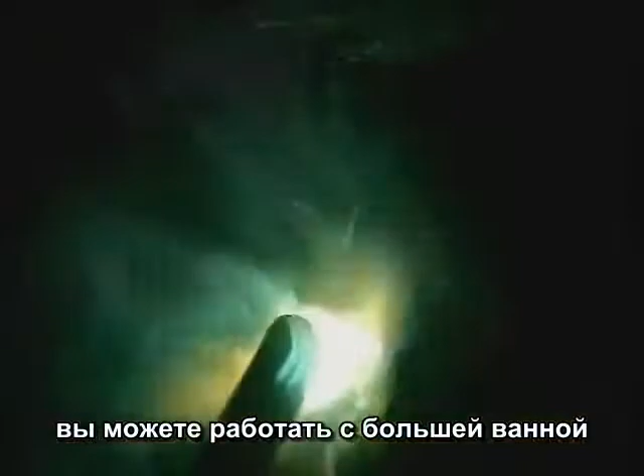The amperage setting and travel speed go hand in hand, especially when you're going uphill. Maintain a constant short arc gap. Don't let the rod burn away, and don't jam the rod into the puddle. As you gain experience, you can carry more metal, but try starting out with a 3/32 rod and keep moving. You don't want the base metal overheating, which is the main reason the puddle falls out.

Overhead with 7018 produces an excellent weld. The heat is going right where you want it. Try about the same amperage you'd use for welding flat and hold the rod nearly straight up and down or angled slightly into the weld.

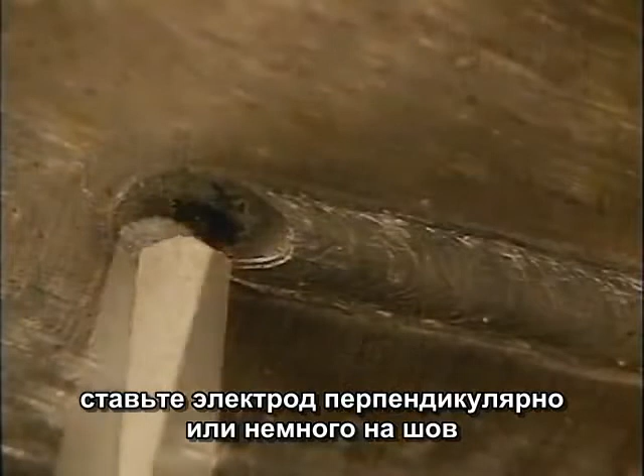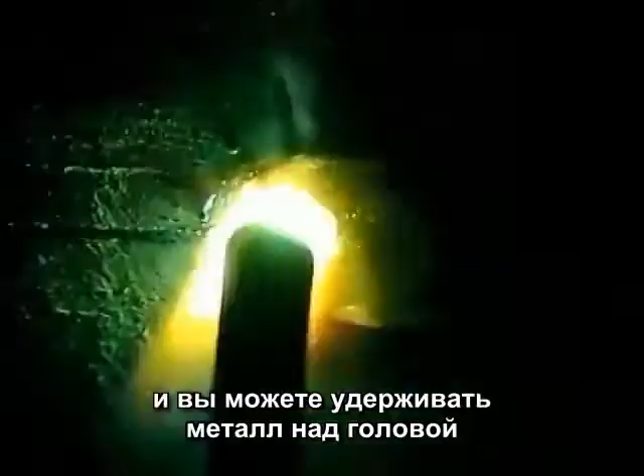You can run straight or try a little side-to-side motion to carry more metal, and you can carry quite a bit of metal overhead. Get comfortable and be creative if you have to. When you can control the rod movement, that metal will stay up there.

However, because the slag remains molten longer, the slag can drip. I usually wear a leather welding jacket for overheads. You will be right underneath the weld. 7018 takes a little more practice, but it's well worth the time to learn how to use this rod.

Well, that's about it. I hope I've given you an idea of what to do and what to look for to run good weld beads. As you're welding, concentrate the whole time you're burning that rod and focus on the molten puddle. Do whatever it takes to make that puddle do what you want it to do. There isn't anything automatic about arc welding. You need to put that metal where it belongs and learn to see the weld as it's going in.

When you're done, inspect every weld you make. If what you did worked, do it again. If it didn't work, try something different.

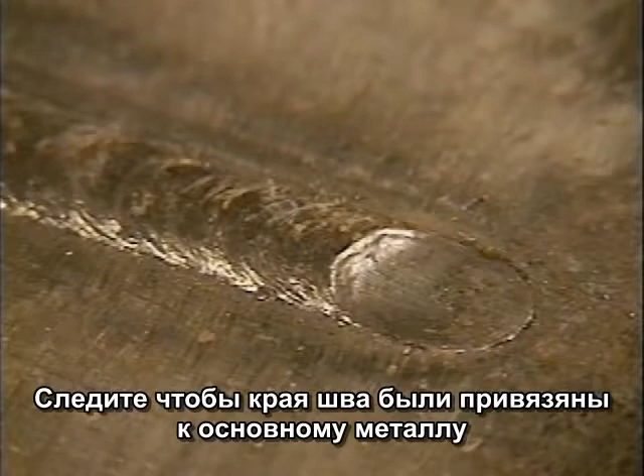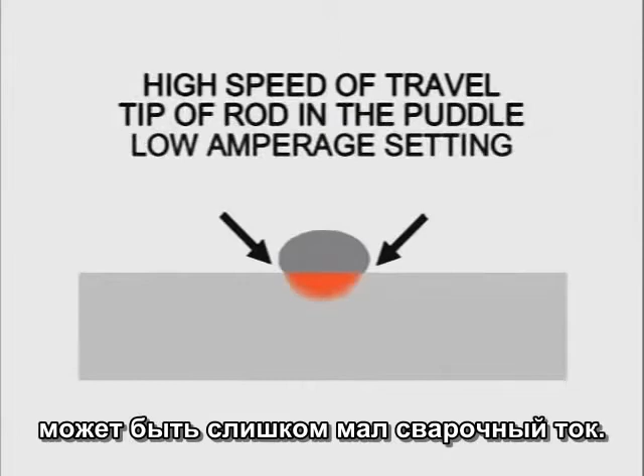A smooth, uniform weld bead will come with practice, but you do want the sides of the weld to be tied in nicely to the base metal. If the sides aren't tied in, you may be moving too fast, jamming the rod into the puddle, or running too low of an amperage setting. Moving too slow will overheat the base metal. Long arcing will produce an inconsistent weld bead with excessive spatter.

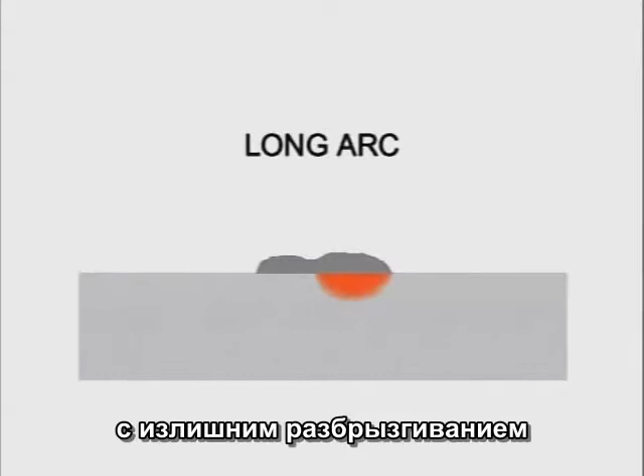Everybody welds a little different, so watch other welders if you get the chance, and develop a style and rhythm of your own. Practice with different types and sizes of rods, and remember, arc welding is about making one good weld bead at a time.